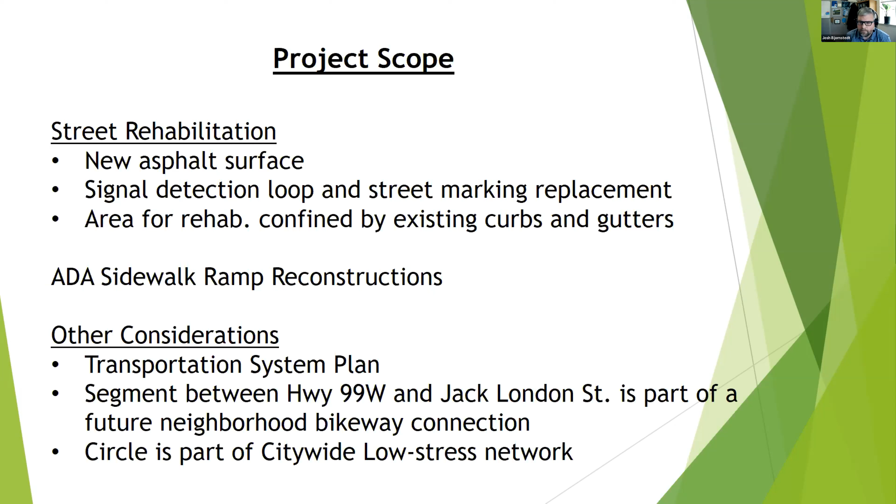For this project, we're looking at a timeline where we started design before the holidays in December. We are currently advertising for construction bids. We plan to open bids on April 4th, and we should have a contractor under contract by the first part of May.

Typically, construction sequence on a project like this is you'll see them working on the sidewalk ADA ramps first, and then we've got a couple of bike ramps we're adding. All of those improvements happen before we get to actually resurfacing or reconstructing the street. There's also outreach going out to the local businesses and residents that should be going out this week, and finally, we will post project information on the city website.

One thing I do with my projects is provide weekly construction updates. It's mostly intended for the businesses and residents directly impacted, but we will post that as well on the city website. It gives a look ahead to what's coming for the upcoming week. We can't foresee too far in advance of impacts to the public, but usually a week ahead we know we're going to be working on such and such side of the street, or we may have certain ADA ramps out of service, so we try to identify those to give the public a heads up on what's coming.

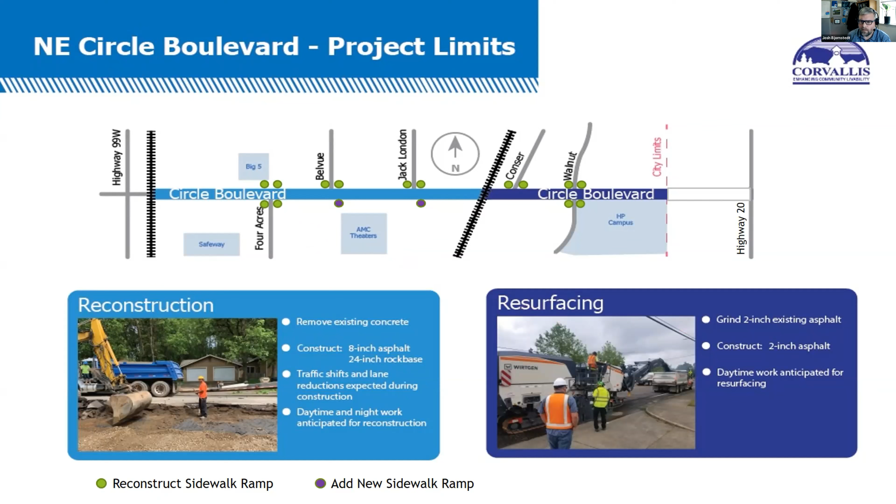Okay, so that was the boundaries of our project and the scope of that work.

What I'm going to go into next is where we can incorporate some of these bike and pedestrian amenities into our work. It's limited in nature, but where we have the opportunity, we'll try to do that.

Starting here on the left, we'll work our way to the right. Overall, with the street we've got here in Walnut, we're going to add buffered bike lanes to the surface. Buffered bike lanes aren't a protective element to the low stress network, but they do provide some separation and buffering for bike users.

That'll run the length of the project from the tracks. I've got another slide that shows it heading all the way to the city limits.

On the west end, we had some requests for getting bicyclists from the multi-use path that runs up 99, for those who don't want to enter at the corner there at the ADA ramp, getting those folks from the sidewalk back onto the on-street bike lanes just after the tracks. There was a request or two on that, and we've got the ability to do that. I'll show more of that later in another slide. So that's an element we're going to add there.

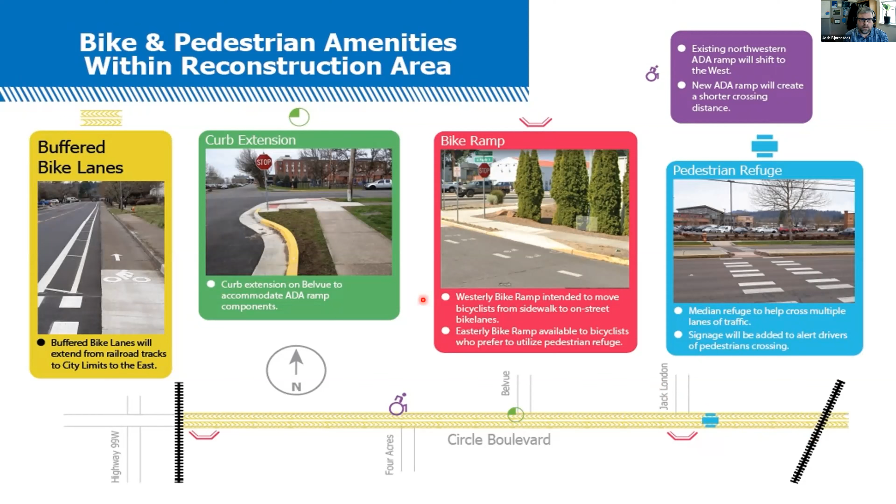So I think that covers the amenities in the reconstruction area. Like I mentioned, in the resurfacing section, really the only amenity we're adding here is the continuation of the buffered bike lanes to the city limits.

There had been some requests on whether Walnut and Circle makes sense for a roundabout. Well, maybe, but that's a larger discussion. If we're talking low stress networks and what that brings, it's a discussion for another forum and a more in-depth discussion at that point.

So like I say, we did receive a lot of comment and a lot of interest in treatments through this section. These that I've just gone through are kind of what we felt like we could fit into the scope of what this maintenance project is.

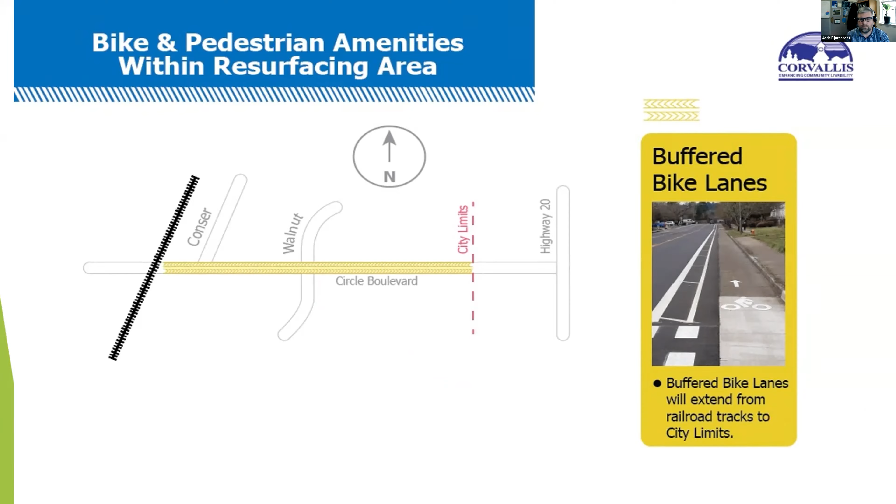So if we look at the section on this - this is Circle Boulevard, and the bottom dimensions I have here are the existing lane widths. We have about 66 feet to utilize between face of curb and face of curb. Existing, we had about a 4 foot 9 inch bike lane, 11-foot travel lanes or plus, 11.25, 12 foot in the median.

We felt like there was an opportunity to narrow up those vehicular lanes, take that additional 4 feet we gained, and add the two buffered bike lanes onto the on-street bike lanes. So we end up with 6 foot 9 inches total width for the bike lane. It's just kind of making the most of what we have with the distance we've got across the street there.

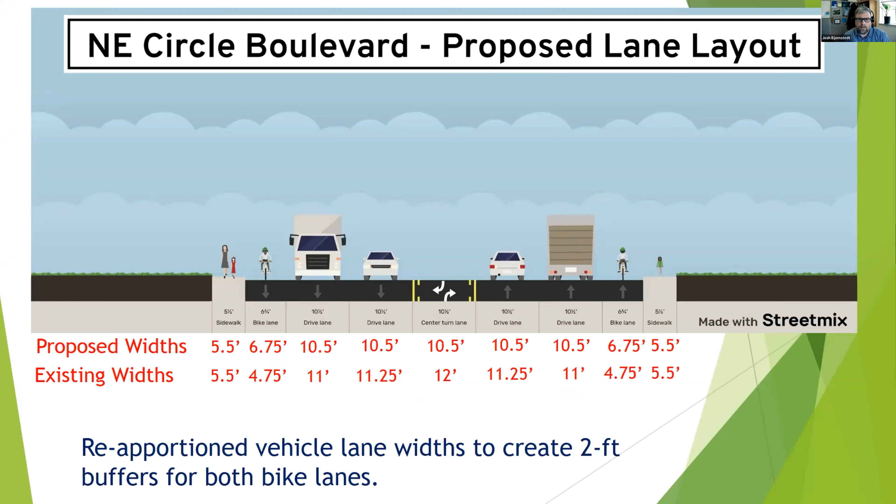The other change you would see on the section is at our right turn lanes. We've got 3 of them, 1 at 4 Acre, and then the 2 at the HP entrances. We will maintain an 11-foot turn lane, a little extra width there for a turning vehicle. And where we've got conflicts with vehicles and bikes, we will stripe that and establish bike lane green zones, as you've seen in many places. We've got them here in town as well.

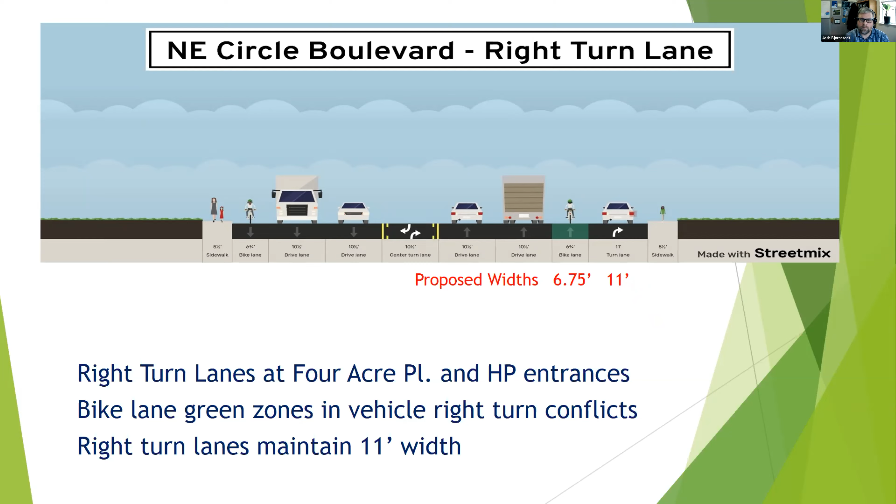So I'm going to go through these next few slides. I've been at webinars where you could spend 2 or 3 days talking about each of these. This is just a very general introduction to what these are, for those who may not know what those amenities are that I've discussed. This is just to provide some very basic information on that.

So our buffered bike lanes are essentially an extension of that on-street bike lane. Typically in town here, we've been establishing these with just street markings, and to the left of the bike lane we try to get the standard 8-foot bike lane, if we have the width to do that. This picture here is actually off of Technology Loop, where we did have the width to get 8 feet. So here we've got the wide gutter pan, similar to what we have on Circle, and we were able to go the total 8 feet, 2-foot buffer and 6-foot bike lane.

So as I showed on that section, we're going to end up with a 4-foot 9-inch bike lane, which is the gutter pan. Our first stripe will start right at that asphalt and concrete seam, and then establish a 2-foot buffer. So it'll be a little different than what you're seeing in this picture. I just wanted to point that piece out.

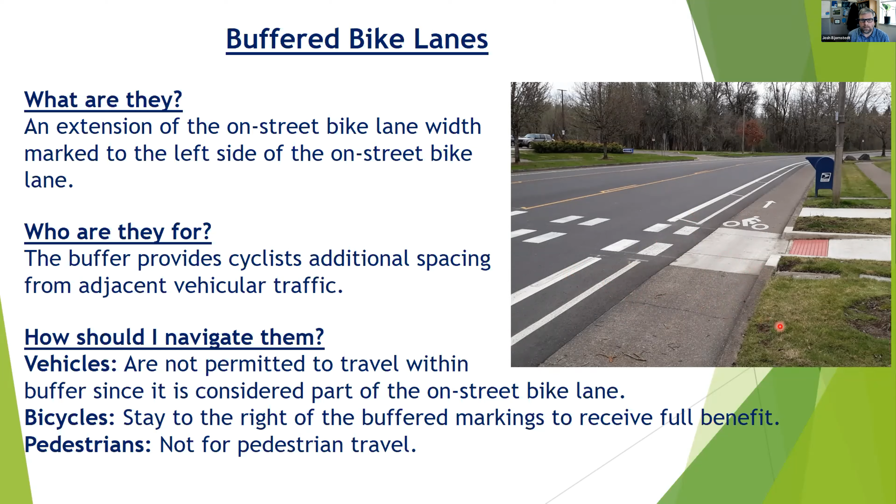Gets the pedestrian out there in the eyes of the vehicle users, also the cyclists. As far as navigating, it's a standard crosswalk for vehicles and bikes, so just be aware when you're turning that it may feel like the pedestrians are out there a little more, even though they're still within the confines of that ADA ramp.

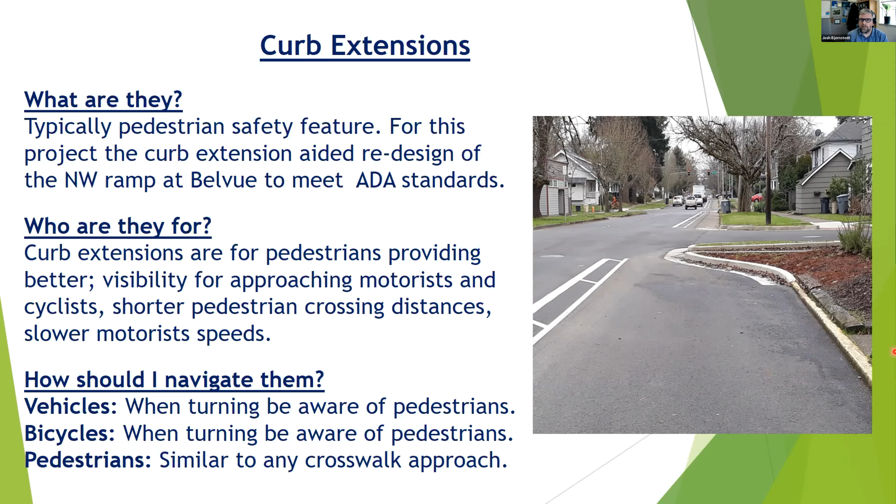The bike ramps - this is kind of a new thing. We're going to give this a try here on Circle. Like I mentioned, it's essentially a transition from a sidewalk to an on-street bike lane, or from the bike lane to a sidewalk. And typically we're talking multi-use paths when we're talking sidewalk in these instances.

We don't have that multi-use path up and down the length of Circle. But what we do have, like I mentioned on that west end, is cyclists coming off of that multi-use path that runs along the highway. If they're just taking that right and crossing the tracks, this would be a way for them to transition from that sidewalk down onto the on-street bike lanes.

And then at the refuge itself, this will take cyclists off of the on-street bike lane and allow them to position themselves in a safe location to look left, right, and then cross when vehicles stop for them. Essentially just trying to provide that smooth transition between the two modal facilities. Really no change for motorists in navigating these bike ramps - just a reminder that you're merging either from a sidewalk onto an on-street bike lane or vice versa. So you're going to want to yield to cyclists already in the lane or pedestrians on the sidewalks.

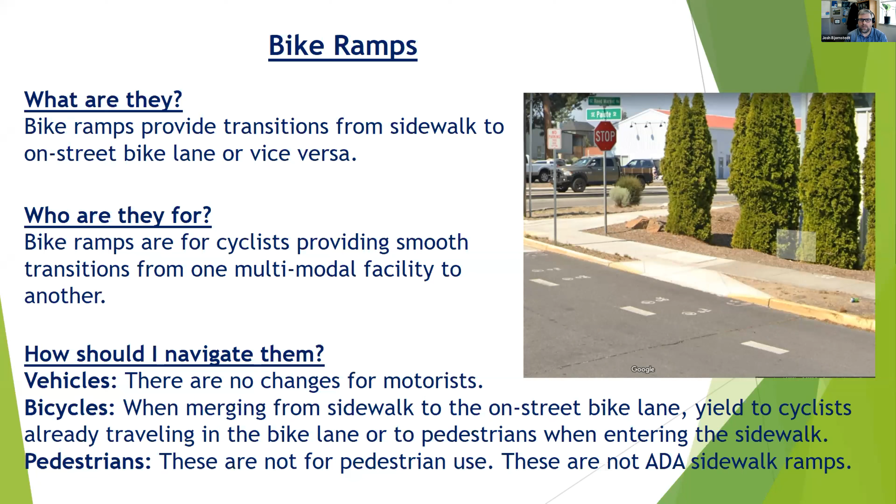The pedestrian refuge, essentially, is just a concrete island with a pass-through. Our pass-through for this project is going to be about 10 foot wide for a 10-foot wide opening. The idea is if there are bicyclists using this with pedestrians, we've got enough width that they can pass by each other.

There will be signs placed for vehicles to stop at stop bars on the project. There will also be some electrical conduits and junction boxes installed for future lighting needs at that refuge by Jack London. So we're planning ahead a little bit for future improvements at that location.

Essentially navigating these, it's a crosswalk. Vehicles need to stop. In this case, it's not a mid-block crossing. It is essentially an enhanced crosswalk at Jack London and Circle. With it being a T intersection, we have a legal crossing there. This will just enhance the safety of that crossing for pedestrians and bicyclists.

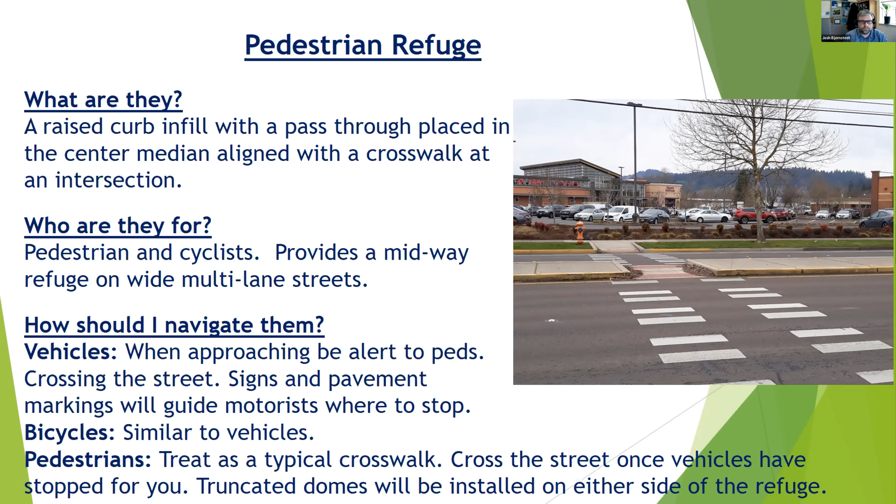We didn't want to go a full 90 crossing to the street. We felt like that was starting to pull this crossing quite a ways away from the intersection. And then similarly on this east side, we pull this one just a little bit to the east. Again, it helps with our ADA design there.

There are some pretty big challenges with making these ramps meet ADA and not impacting this entire business as far as their access or their asphalt parking lot. And then with these relocations, we'll have new pedestrian push buttons that get installed so they're close to those crosswalks.

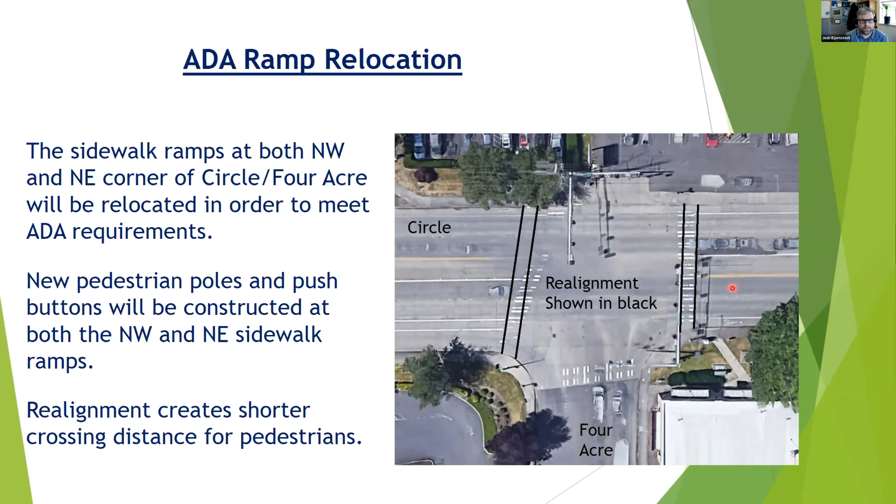We're excited to get this one going. I think Circle's been on a lot of people's minds as far as how that surface rides for vehicles and for bicyclists. And I'll just end again with, we recognize there's more work to be done with respect to the low stress network.

But I think those conversations can start, though they'll need to end up at a point where maybe it's a forum itself, almost like a workshop where we're getting information from folks and then being able to build that into actual CIP projects. So anyway, that's it. I'll turn it over back to Steve.